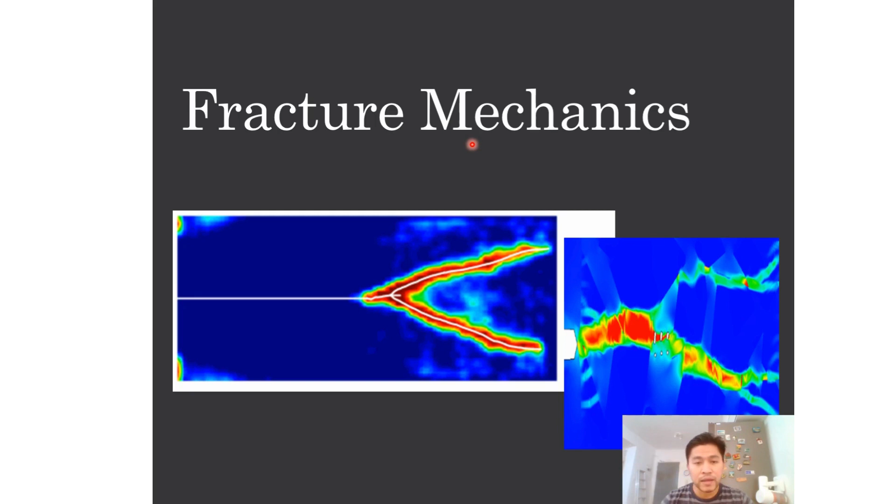In fracture mechanics, what we want to know is the maximum stress that a material can withstand if it contains a flaw of a certain size and geometry. The fracture toughness measures the ability of a material that contains a flaw to withstand an applied loading.

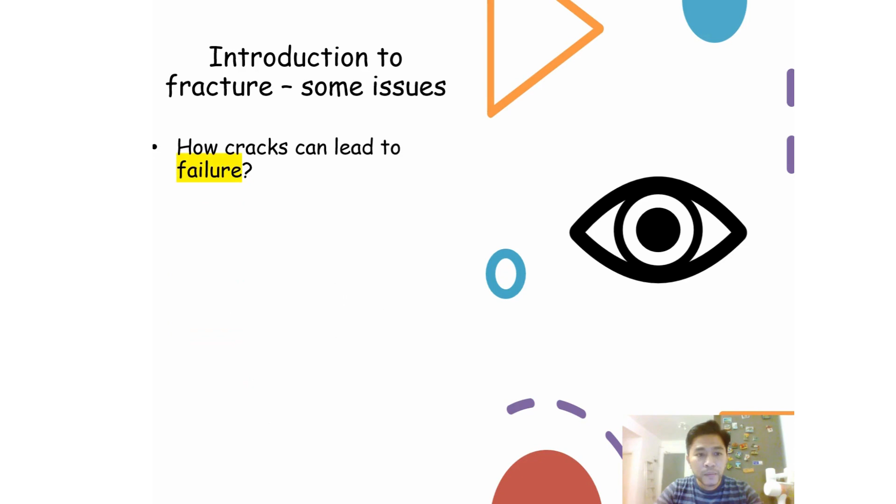Here we have some issues that we can relate to this chapter. The first one is how cracks can lead to failure. How do we quantify fracture resistance? How does fracture resistance differ for different types of material? We will also be discussing estimation of stress to fracture, and also the loading rate, the loading history, and the temperature effects on the material's behavior.

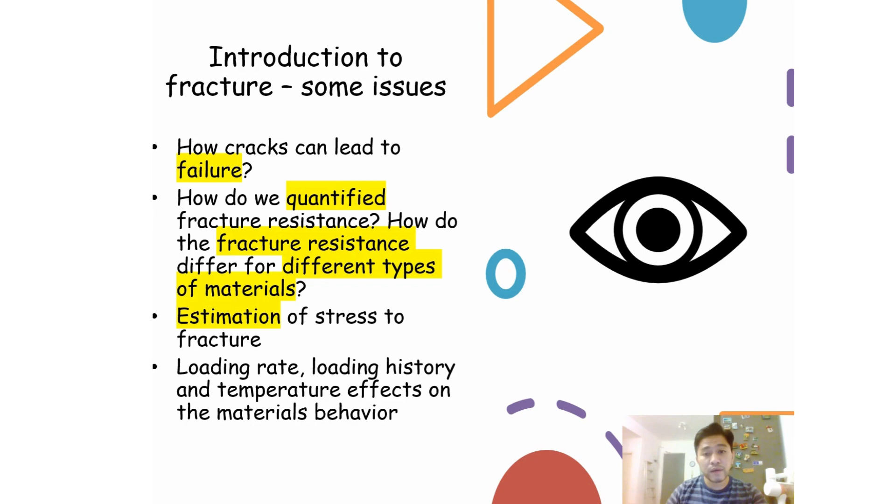So what does it mean by fracture mechanics? Fracture mechanics refers to the mechanics of solids that contain cracks, with special attention to their growth.

Fracture mechanics is a failure theory that, firstly, determines material failure by energy criteria, possibly in conjunction with a strength or yield criteria. Secondly, we consider failure to be propagating throughout the structure rather than simultaneous throughout the entire failure zone or surface.

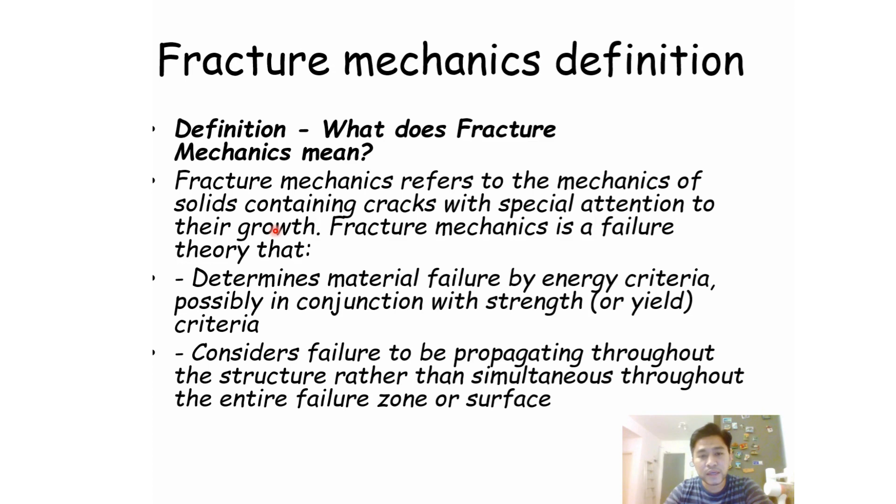Now we will be discussing some importance of fracture mechanics. Fracture mechanics is very important, especially for the first one, in terms of the selection of a material.

Let's say we know the maximum size A of a flaw in the material and also the magnitude of the applied stress. Then we can select a material that has a K sub C that is large enough to prevent the flaw from growing. K sub C is the fracture toughness.

Also, in terms of design of a component, let's say we know the maximum size of any flaw in the material, and therefore its K sub C has already been selected. We can calculate the maximum stress that the component can withstand, and then size the part appropriately to ensure that the maximum stress is not exceeded.

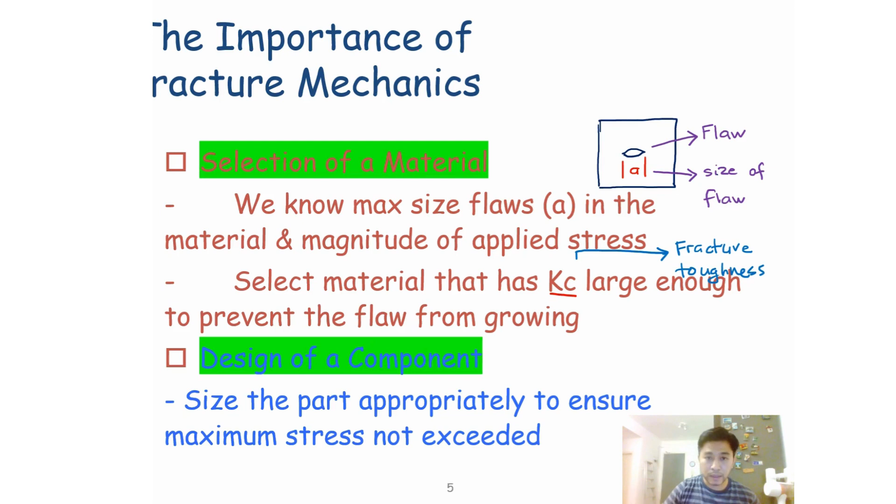Also, if the material has been selected, the applied stress is known, and the size of the component is fixed, then we can calculate the maximum size of a flaw that can be tolerated. A non-destructive testing technique that detects any flaw greater than this critical size can help to ensure that the part will function safely.

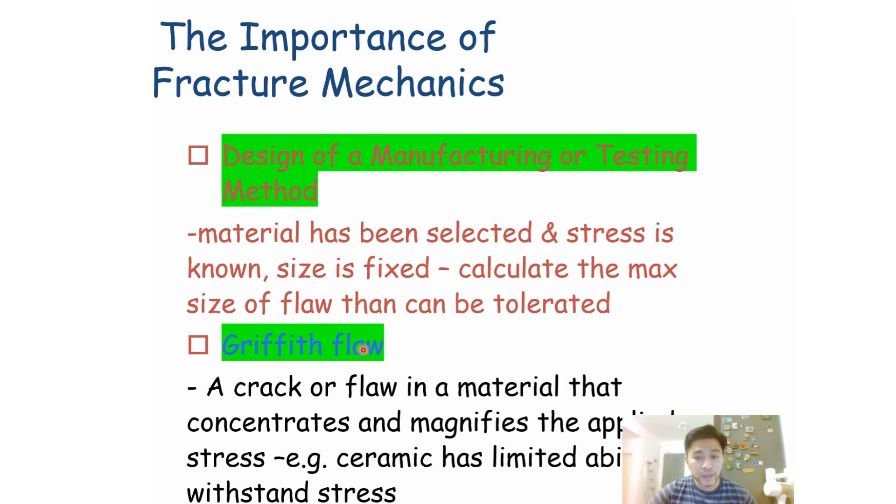Also, any crack or imperfection limits the ability, for example, let's say we have a ceramic, to withstand a tensile stress. This is because the crack, which we sometimes call a Griffith flaw, will concentrate and magnify the applied stress. We will be talking more about this in the upcoming slide.

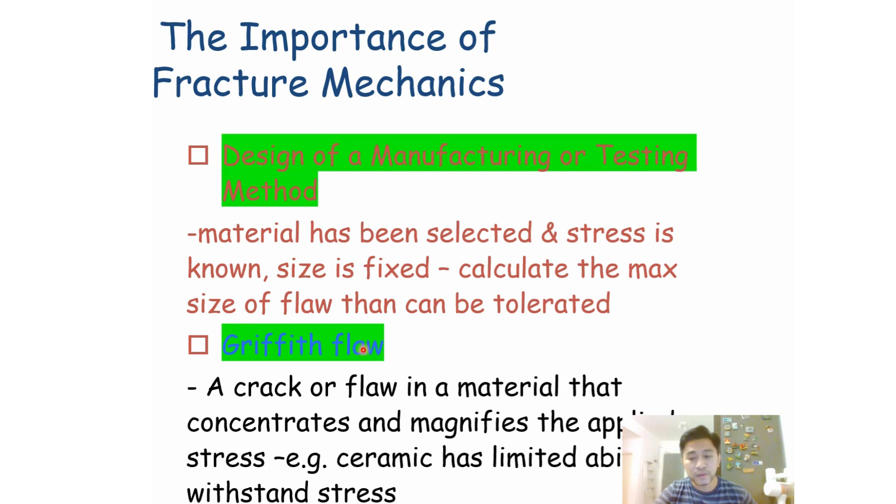So how do we define fracture? Failure, as we already know, is the state or condition of not meeting a desirable or intended objective of the object or material. On the other hand, a fracture is the separation of an object or material into two or more pieces under the action of applied or induced stress.

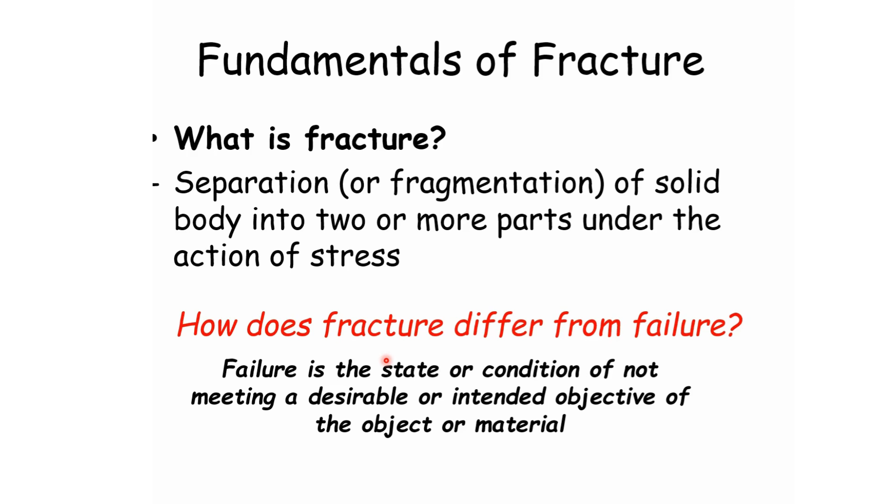So how does a fracture differ from a failure? We can say that a failure is the state or condition of not meeting a desirable or intended objective of the object or material. On the other hand, fracture is the separation of an object or material into two or more pieces when we apply stress to that particular material.

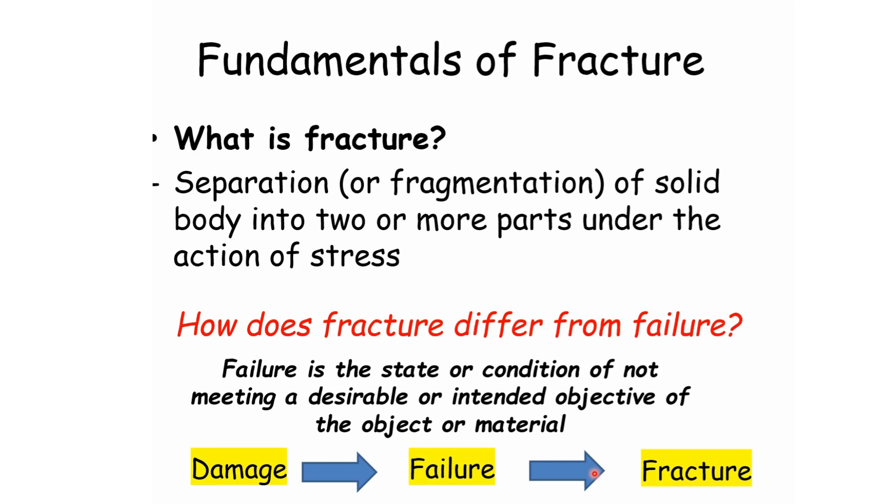Damage will lead to failure, and failure will finally lead to a fracture. So here we can see the relationship between failure and how damage will lead to failure, and subsequently failure will lead to the fracture of material.

So when a crack is present in a material, there is a critical stress that must be exceeded in order for a crack to grow. The level of stress required is defined by the amount of work that must be done for crack growth, and this level of work is referred to as the material toughness, or G sub C. So when a crack is present in material, the crack tip stress, or sigma sub m, should be larger than sigma sub c, the critical stress, in order for the crack to grow.

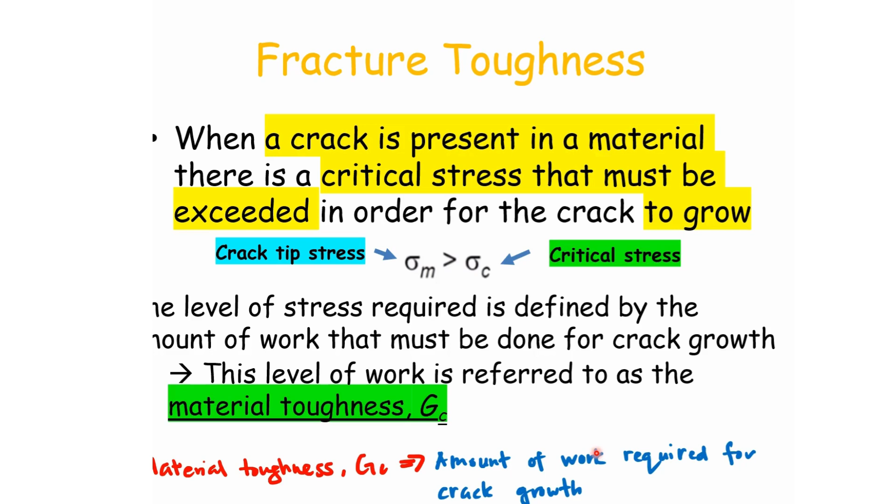So material toughness, G sub c, we can say is the amount of work required for a crack to grow.

When G sub c is low, this indicates that crack growth is easy, such as in glass or cement material. When we have a high G sub c value, this indicates that crack growth in the material is difficult, such as in materials like copper or plastic composite. So low G sub c means crack growth is easy, and high G sub c means crack growth is difficult compared to materials with a low value of G sub c.

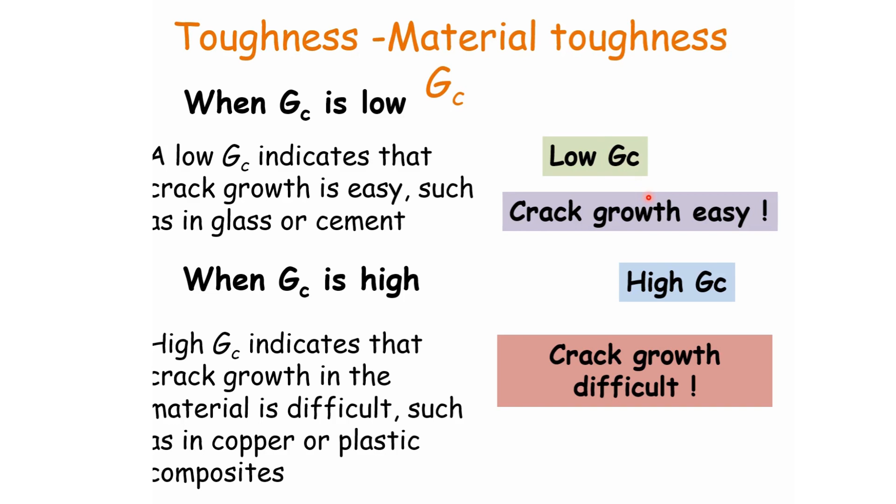How do we define fracture mechanics and fracture toughness? Fracture mechanics is a methodology used to predict and diagnose the failure of a part with an existing crack or flaw on the surface or within that material.

The presence of a crack in the part magnifies the stress in the vicinity of the crack and may result in failure prior to that predicted using traditional strength of material methods.

On the other hand, we have fracture toughness, which is the resistance of a material to failure in the presence of a flaw. A material can resist an applied stress intensity up to a certain critical value, above which the crack will grow in an unstable manner, and failure will occur.

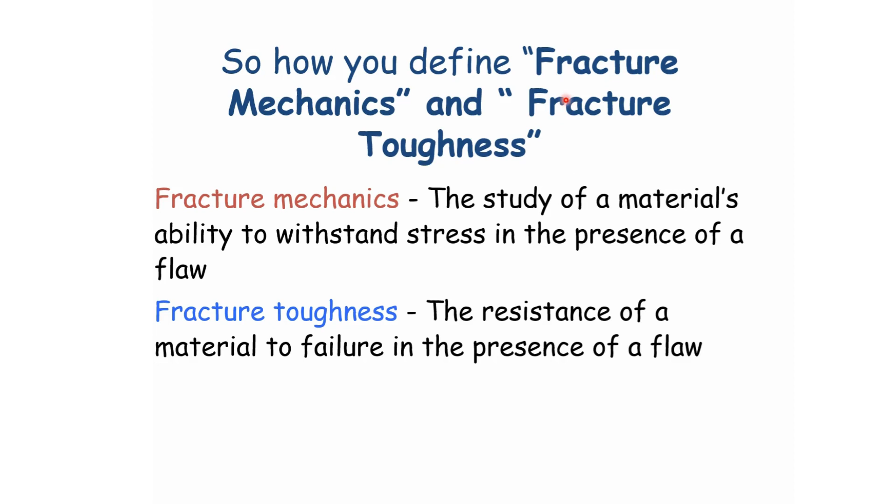Now we will be talking about failure modes in a material. There are three primary modes that define the orientation of a crack relative to the loading. A crack can be loaded in one mode exclusively, or in a combination of modes. Here we have three types of failure mode. The first one, mode 1, is an opening mode where displacement is normal to the crack surface.

In the middle, we have a sliding mode, or in-plane shear, where the displacement is in the plane of the plate. The third one is mode 3, also known as tearing mode, where out-of-plane shear occurs.

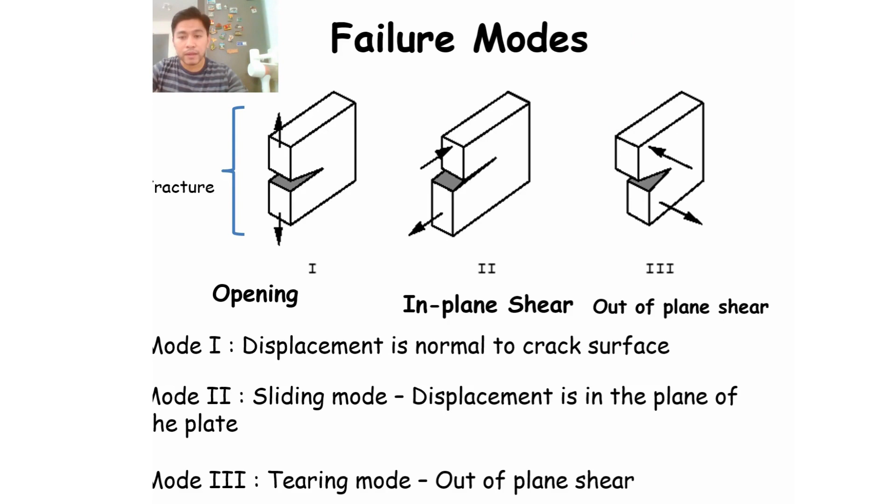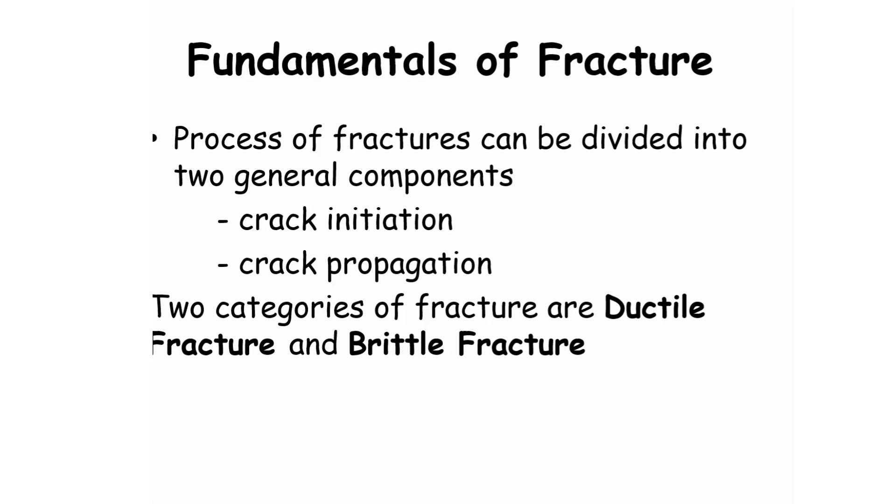The process of fracture can be divided into two general components: crack initiation and crack propagation. Remember that the two categories of fracture are ductile fracture and brittle fracture. Recall the characteristics: ductile fracture comes with significant plastic deformation, while brittle fracture comes with little or no plastic deformation, and is catastrophic in nature.

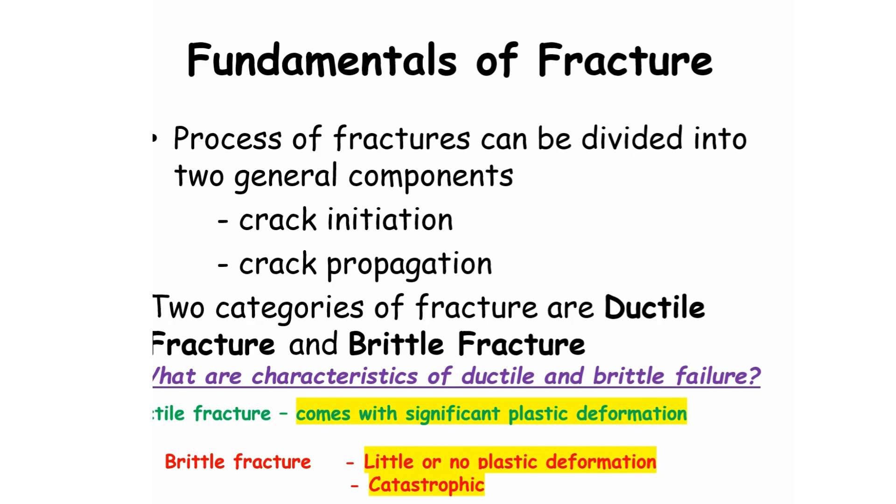Now we will talk about some fundamentals of stress concentration. A prerequisite for crack propagation is that the stress at the tip of the crack must exceed the theoretical cohesive strength of the material.

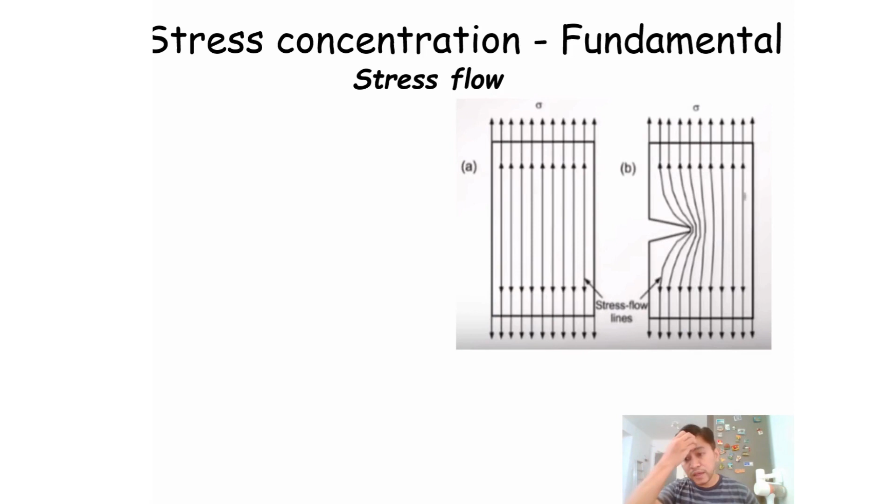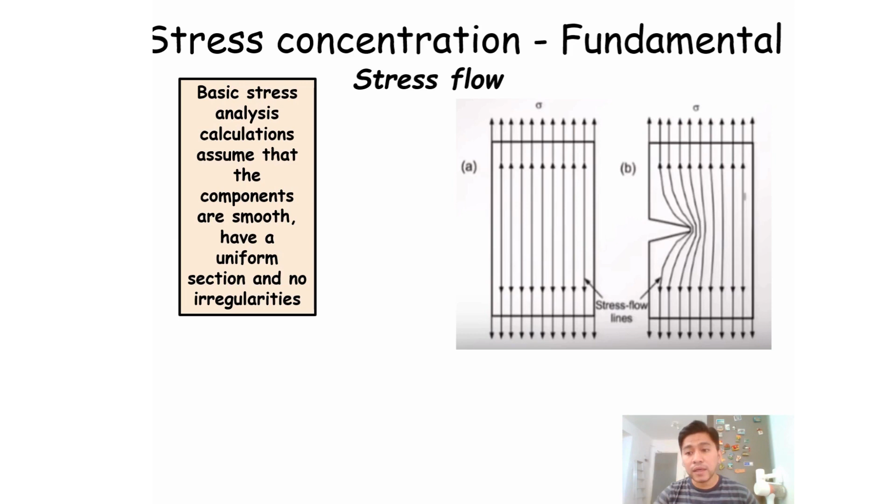In basic stress analysis, we assume that components are smooth, have a uniform section, and have no irregularities. But in practice, virtually all engineering components have changes in section and/or shape.

Let's look at two examples. In figure A, we can see that the flow of stress is smooth. But because of the existence of a fracture on the surface, there is an interruption in the stress flow line, and we can see that more stress is concentrated at the tip of the crack.

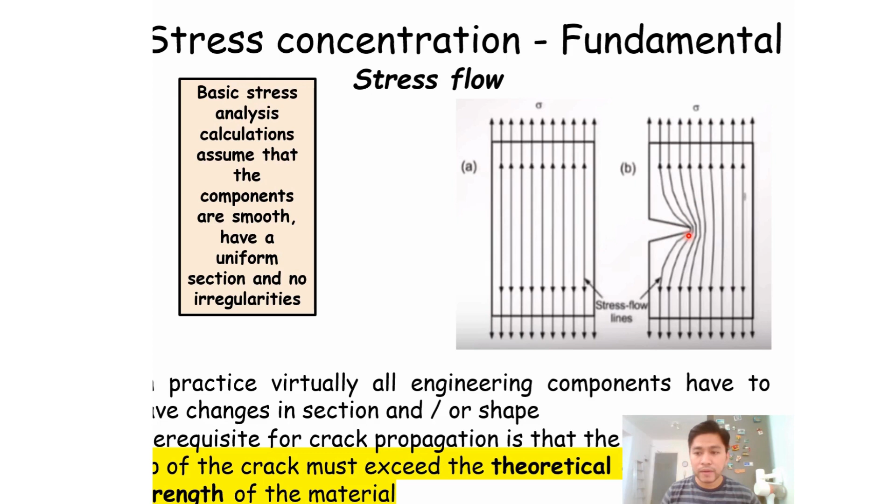Any discontinuity changes the stress distribution within its vicinity, so that the basic stress analysis equation no longer applies. Such a discontinuity, or stress raiser, causes a local increase of stress that we refer to as stress concentration.

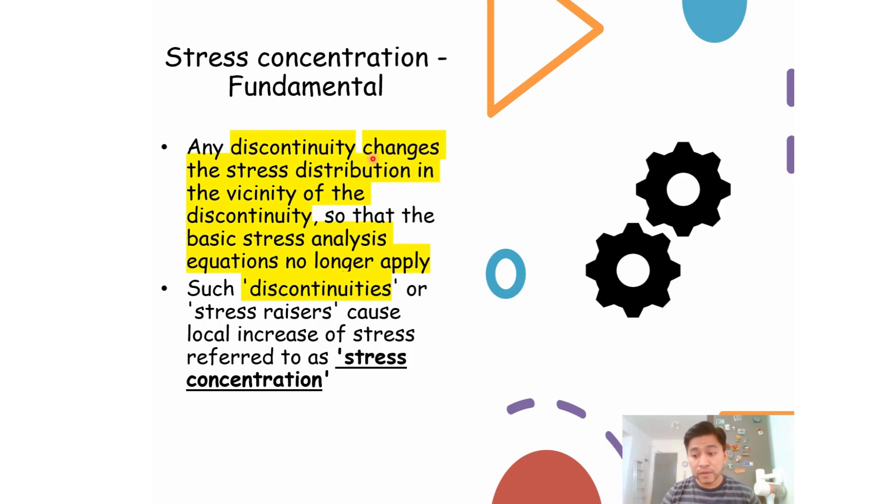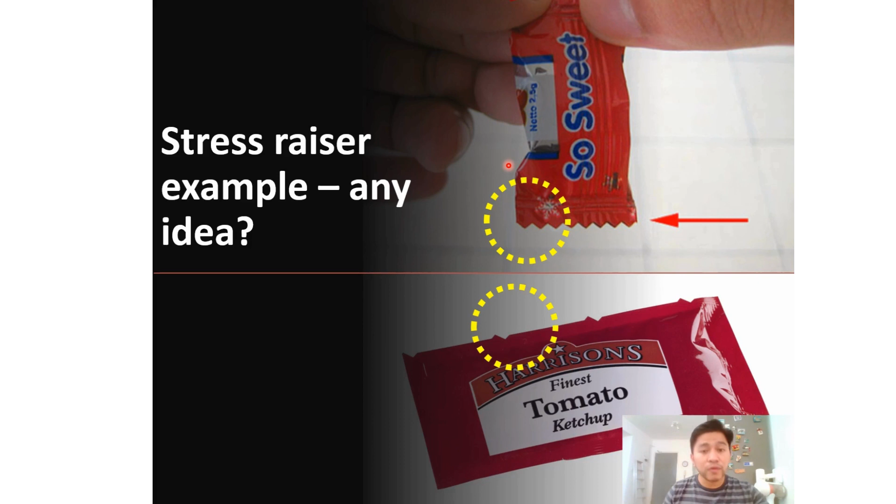I want to give you one example of stress concentration that we encounter almost daily. Imagine the stress concentration is the notches on the edge of a candy wrap. Without the notch, it is almost impossible to rip open the candy wrap with a bare hand. What does this notch do? It amplifies the stress on a very small area on the edge, and thus induces a failure on the wrap.

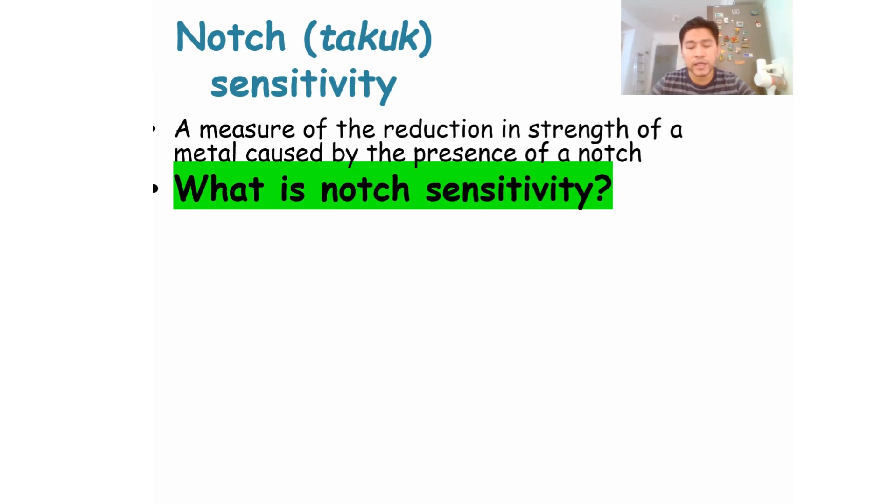Now we will be talking about a notch, or in Bahasa Melayu, a takuk. We will be talking about notch sensitivity. We can define notch sensitivity as to what extent the sensitivity of a material to fracture is increased by the presence of a surface inhomogeneity, such as a notch or a sudden change in section. A low notch sensitivity we usually associate with ductile materials, and a high notch sensitivity we usually associate with brittle materials.

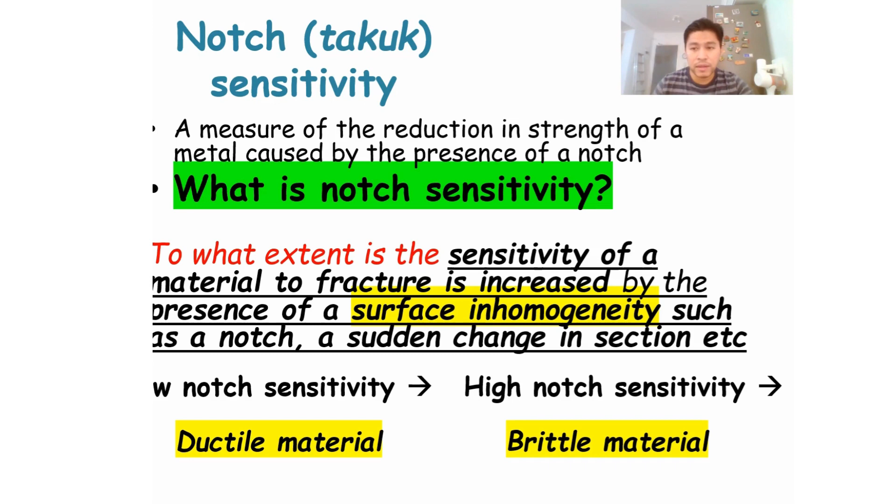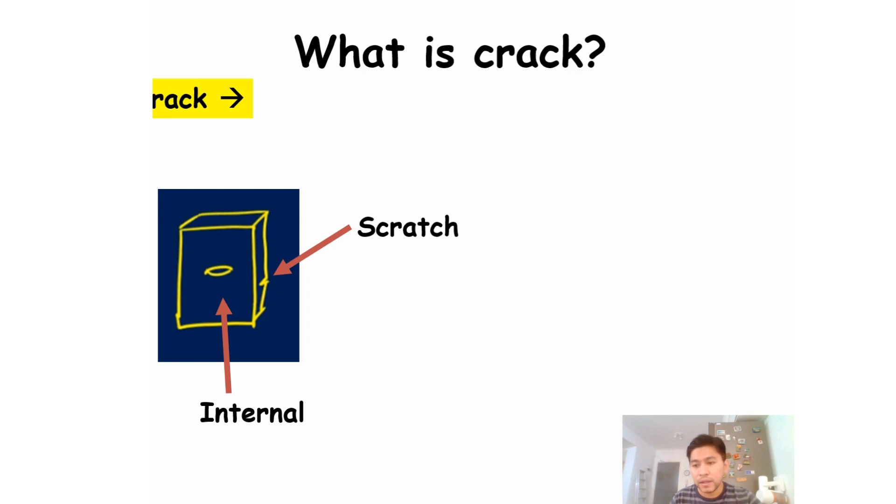So what is actually a crack? A crack is a localized breakdown of bonds in a material. It could be internal or a scratch on the surface. A crack will form in a material either inside or on the surface, as we can see in the figure here.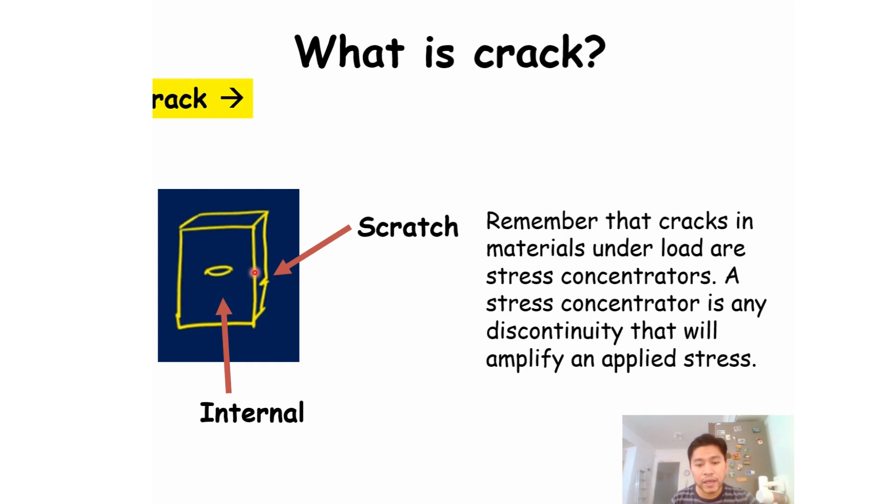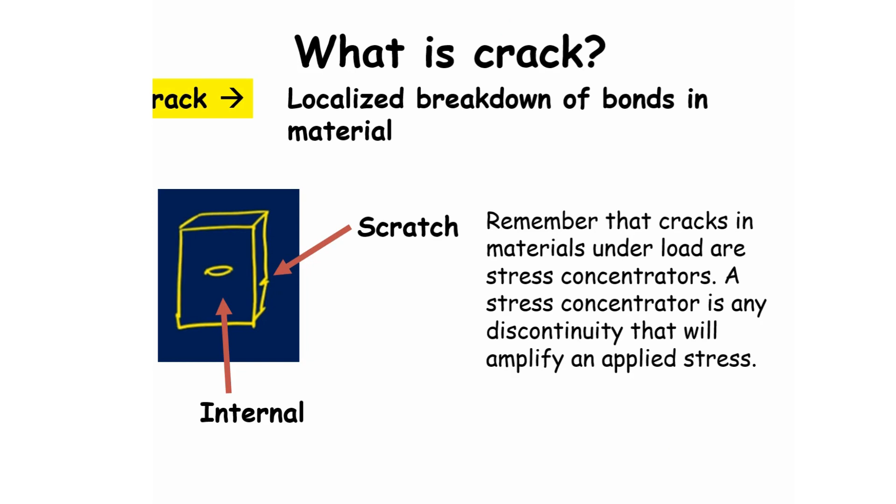We have to remember that cracks in materials under loading are a stress concentrator. A stress concentrator is any discontinuity that will amplify the applied stress. So this is the definition of a crack: a localized breakdown of a bond in a material. It could be internal, inside that particular material, or on the surface. We have to know that stress cannot be transferred to the crack, and therefore stress is concentrated at either side of the crack. The transition from the slow, stable phase to the fast, unstable phase happens when the crack becomes critical, or when it reaches a critical length.

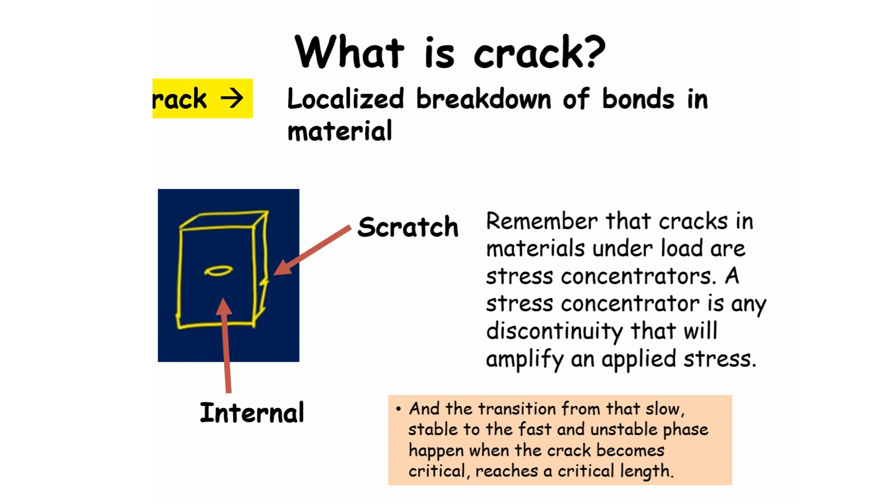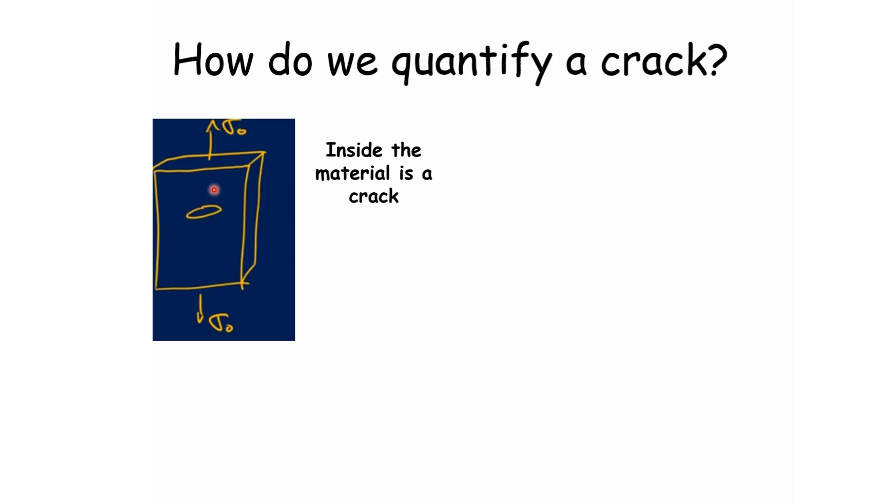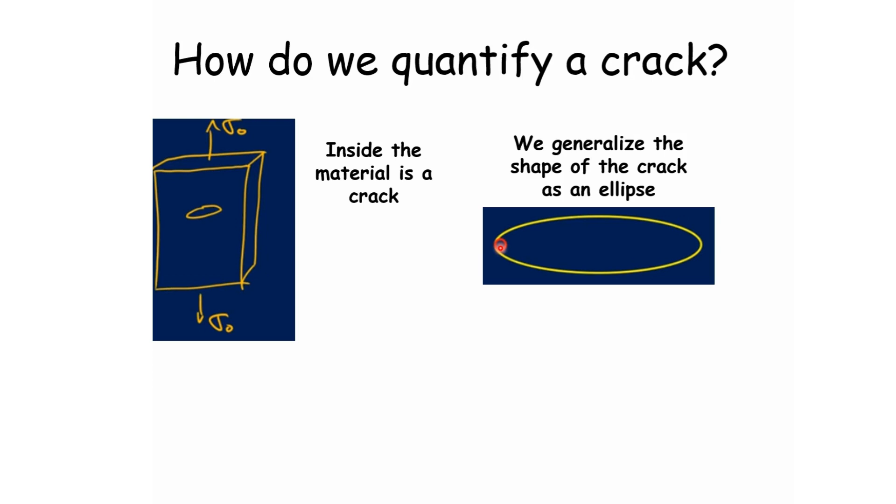Now we move on to how we quantify a crack. Let's say we have a material and we apply a stress to it, sigma naught, and inside the material we have a crack, like in the figure. We generalize the shape of the crack as an ellipse. At the tip of the crack, we have a small circle to show the sharpness of the crack, and the radius of curvature that we call rho. If the radius is small, we call it a sharp crack. But if the radius is quite large, we call it a blunt crack.

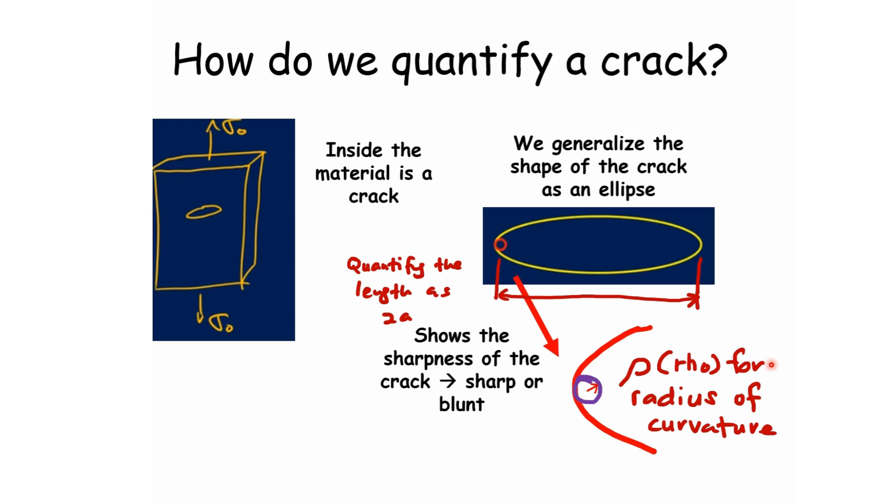We can also quantify the length of the crack as 2a. From all these values, we can quantify the stress concentration factor, K sub T, which equals the maximum stress at the tip of the crack divided by the applied stress, and that is roughly equal to 2 times the square root of half the length of the crack divided by rho, the radius of curvature. Here, sigma max is the maximum stress at the tip, and sigma naught is the applied stress.

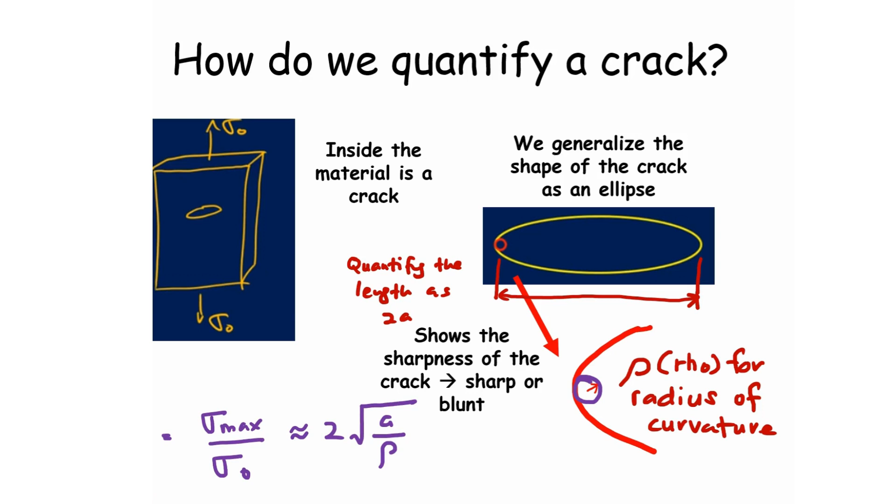The reason for this acceleration in growth is that the growth rate is dependent on the stress intensity factor at the crack tip, and the stress intensity factor is dependent on the crack size, A. As the crack grows, the stress intensity factor will increase, and this will lead to a faster growth.

And the crack grows until it reaches a critical size, and failure will happen. So we can characterize the process of failure by first, crack initiation. Then we move on to crack propagation, where the crack advances incrementally with each stress cycle. Subsequently, we enter final failure, which occurs very rapidly once the advancing crack reaches a critical size.

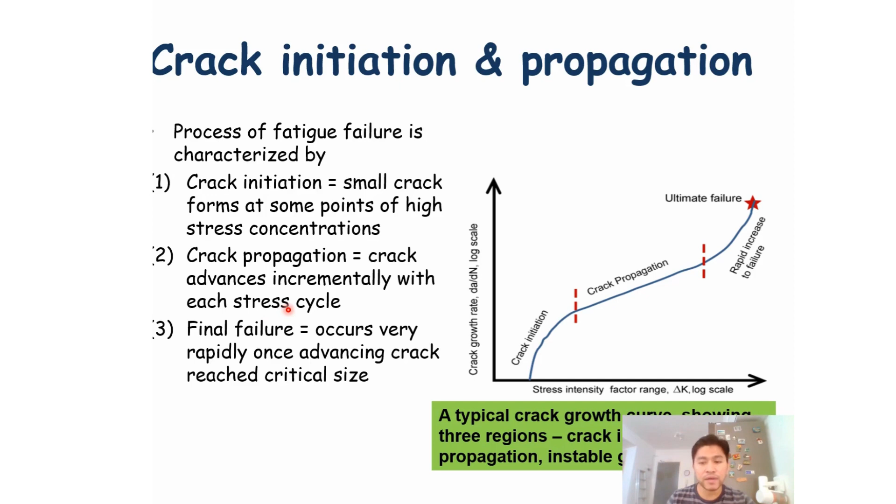We know that the fracture stress depends on the crack size, and we also know that the fracture stress depends upon the material property such as stiffness. The first person to establish a quantitative relationship between fracture stress, crack size, and stiffness was a scientist named Griffith.

Griffith attributed the discrepancy between the observed fracture strength of a crystal and the theoretical cohesive strength to the presence of flaws in a brittle material. This theory is only applicable to perfectly brittle materials such as glass, and we cannot use this theory directly for metal.

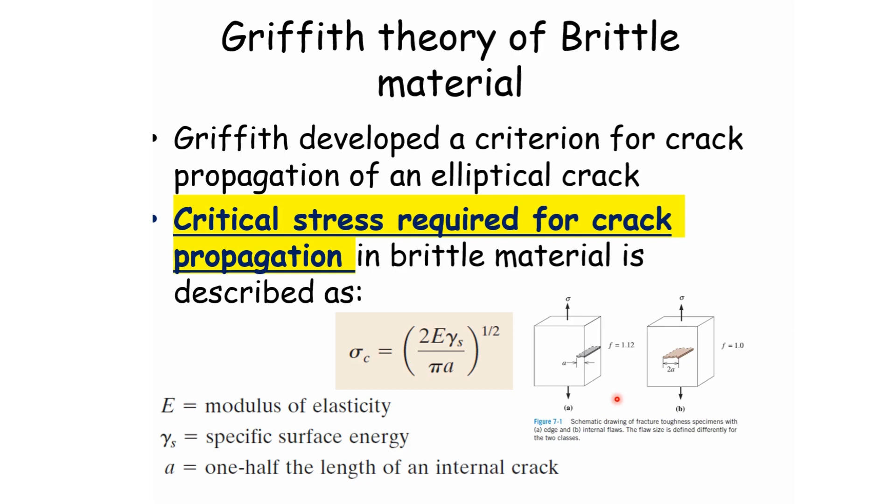So when the crack spreads, the surface area of the crack will increase. In short, any crack or imperfection will limit the ability of that particular material, for example a ceramic, to withstand a tensile stress that we apply. This is because the crack, or sometimes what we call a Griffith flaw, will concentrate and magnify the applied stress.

So when a crack propagates, elastic energy is released in a volume of material, and two new surfaces are created. The crack propagates if the elastic strain energy release is higher than the surface energy.

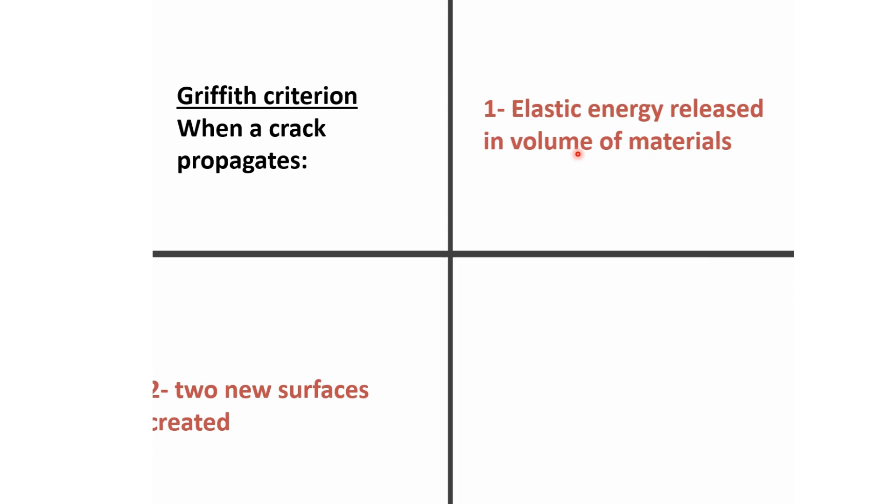So a crack or imperfection will limit the ability of a ceramic, for example, to withstand the stress that we apply. This is because the crack will concentrate the applied stress.

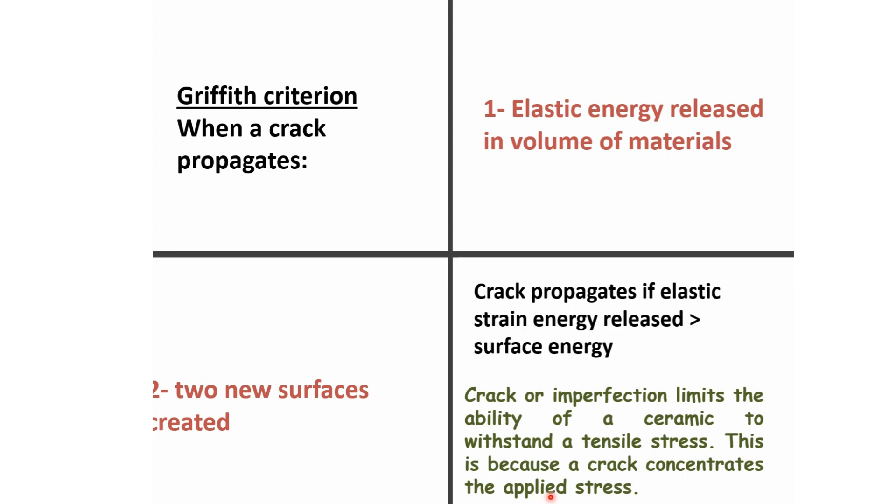Flaws are stress concentrators, and the stress will be concentrated at the crack tip. So it is assumed that a crack is similar to an elliptical hole through a plate, oriented perpendicular to the applied stress. The maximum stress, sigma m, occurs at the crack tip and may be approximated by the equation that we can see here.

So this is the Griffith crack model, and this is the equation, where rho sub t is the radius of curvature at the crack tip, sigma naught is the applied stress, and sigma sub m is the stress at the crack tip.

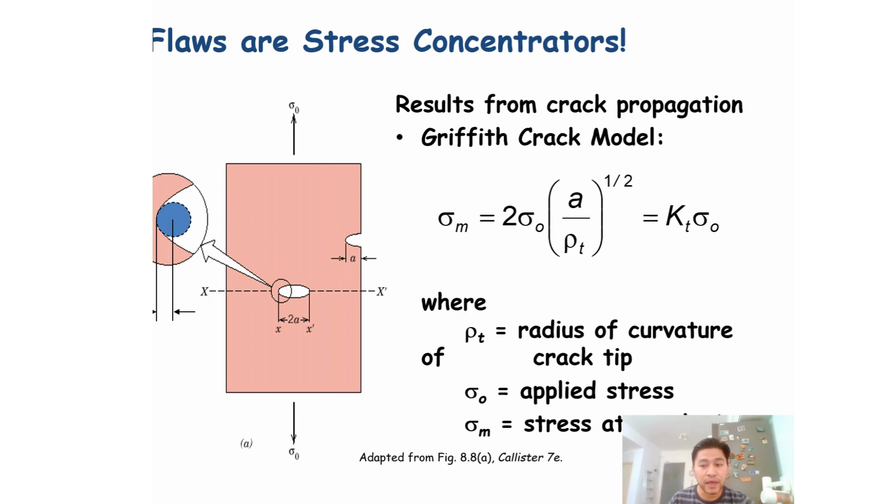So these flaws are detrimental to the fracture strength because an applied stress may be amplified or concentrated at the tip. The magnitude of this amplification depends on the crack orientation and also the geometry. This phenomenon is demonstrated by the figure here.

We can see a stress profile across a cross section containing an internal crack. As indicated by this profile, we can see that the magnitude of this localized stress diminishes with the distance away from the crack tip.

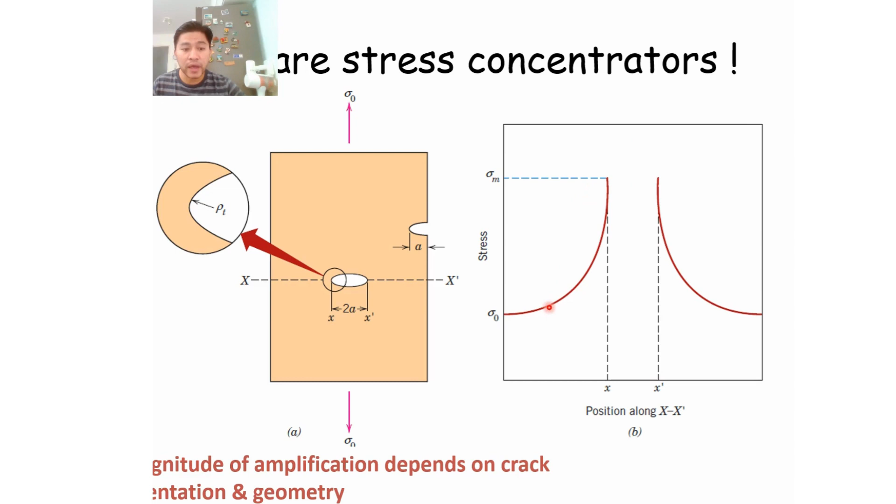So when we try to design a part, it is important to avoid a sharp corner, because we want to avoid a stress concentrator. So how do we achieve that? We can avoid a sharp corner by adding a fillet to our part.

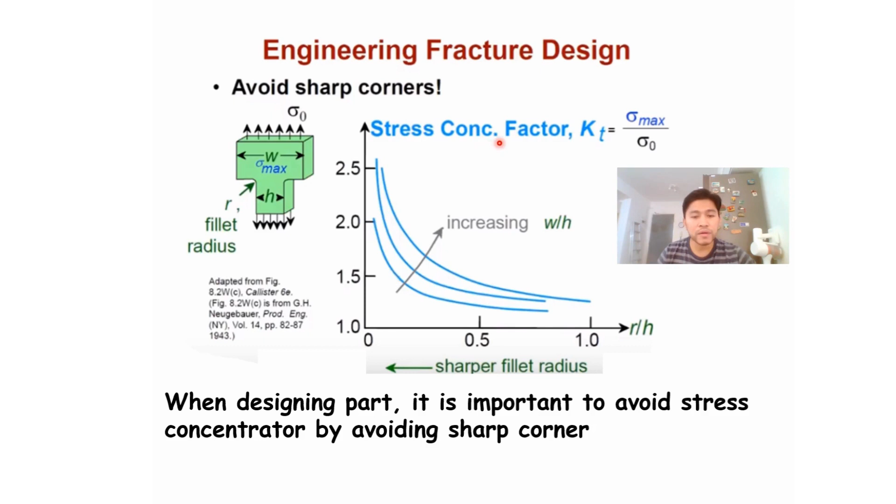So the sharper the fillet radius, the more stress concentration we have, and eventually this will lead to a failure. So here we have a stress concentration factor, K sub T. It is a dimensionless factor that is used to quantify how concentrated the stress is in a material.